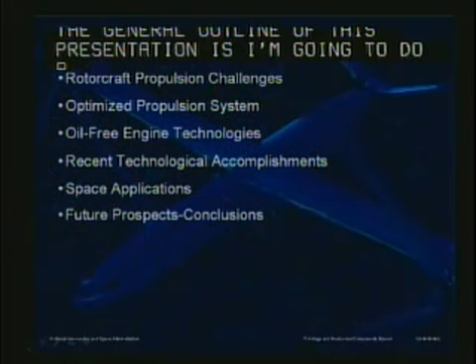The general outline of this presentation is as follows. I'm going to be doing a little bit of a background tutorial on rotorcraft propulsion challenges, because the challenges in rotorcraft propulsion are very unique compared to other flight regimes. And weight, I'll tell you right now, weight is a critical issue.

I'm going to be talking about developing a new concept called the optimized propulsion system, which really opens up the architecture trade space for future rotorcraft. And I'll talk about the oil-free engine technologies that make the optimized propulsion system possible.

I'll spend probably most of my time talking about oil-free engine technologies, and I'll be talking about the three key technologies: foil air bearings, high-temperature solid lubricants that protect those bearings during startup and shutdown periods, and the computer and analytical-based modeling that we do to try to integrate these three key technologies.

Then I'll review some recent technological accomplishments to try to give you a flavor for what the technology development path is, from first concept to laboratory work to first demonstrations and finally commercialization. And then I'll touch on where this technology helps the other part of NASA in the space power generation arena. And then I'll wrap up by talking future prospects and conclusions.

Next chart, please. And another way to put this outline is what I call the technology circle. If you think about it, at the top of the chart, we've got flight vehicles. That's our Cleveland Metro Health Center rescue helicopter.

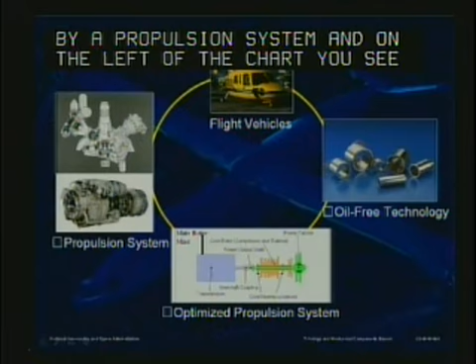That flight vehicle is supported by a propulsion system. And on the left of the chart, you see the propulsion system photograph of a turbine engine, which is used for its high power-to-weight ratio.

And that turbine engine drives a gearbox that reduces the high turbine shaft speed to the low rotor speed needed for efficient helicopter operation. And what we're trying to do is develop technologies that allow us to optimize that propulsion system.

That cartoon at the 6 o'clock position on the chart shows an engine on the right-hand side, which we're trying to make oil-free by taking the oil out and putting air bearings in, and then developing a specific multi-speed transmission that together form the optimized propulsion system.

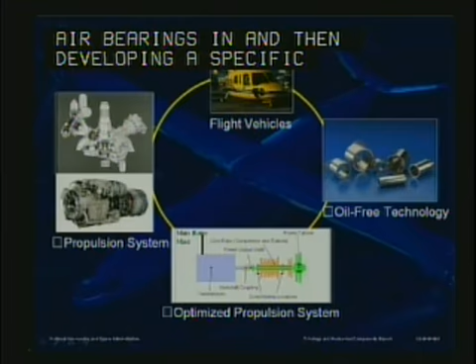And the way we do the optimized propulsion system engine, the oil-free engine, is to adopt oil-free technologies, and the photograph there shows some foil air bearings and specialized shafting that are put into those bearings. So as I go through this presentation, and I'm going to be spending time on the oil-free technologies, think about how those technologies feed into the optimized propulsion system that then go into future flight vehicles.

Next chart, please. Now, NASA's goal for rotorcraft is to radically improve the civil benefits of rotary wing vehicles. We're really talking about improving ease of access, reducing congestion at airports, enhancing the capabilities of emergency and rescue services.

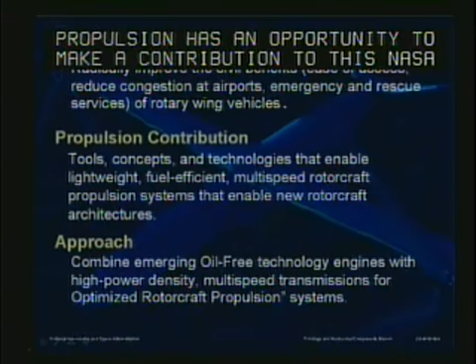Propulsion has an opportunity to make a contribution to this NASA goal. And when I talk about propulsion's contribution, I'm talking about developing tools, concepts, technologies, all aimed at enabling a lightweight, fuel-efficient, multi-speed rotorcraft.

Enabling new rotorcraft architectures. And when I talk about multi-speed rotorcraft, I'm talking about the ability of a rotorcraft to do vertical lift and faster forward flight than we can currently do.

The approach that we're taking to come up with these new propulsion systems to help NASA achieve this goal is to combine emerging oil-free technology engines with high power density, multi-speed or variable speed transmissions, in terms of that optimized propulsion system I talked about before. Next, please.

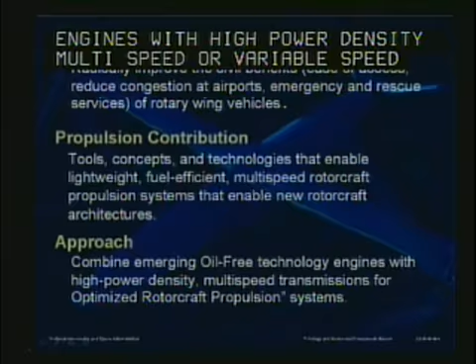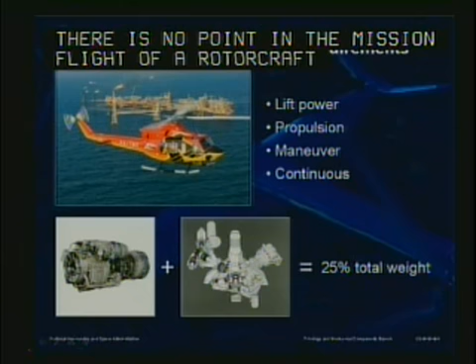And it has to do this at all times. There is no point in a mission flight of a rotorcraft that it can just kind of coast or glide in for a landing. The engine and transmission system has to be there all the time.

And it turns out that the total weight for a rotorcraft propulsion system, that being the engine and the drive system—you can see on the chart the engine at the lower left, added with the transmission or the gearbox—equals 25% of the total weight of the rotorcraft.

That 25% is a very large number. It's at least twice the total weight of the propulsion system in your traditional fixed-wing aircraft. What that means in performance terms is that everything we can do as propulsion system designers to reduce the weight of the propulsion system pays enormous dividends and benefits in enabling capabilities of the rotorcraft, more so than a fixed-wing aircraft. So if we can cut weight out of the propulsion system, we can do a lot more.

Next chart, please. So rotorcraft engines, they need to be lightweight, they need to be efficient, they need to be ultimate in reliability. They also need to be affordable.

They spend a lot of time flying close to the ground, rotorcraft do. They kick up a lot of dirt and debris, so the engines have to be very debris tolerant. And going hand in hand with debris tolerance is high durability, especially in rotorcraft engines, which tend to be smaller than your traditional fixed-wing aircraft. Internal engine clearances, for example, damage due to sand ingestion and erosion, can degrade performance more so than a large engine. So durability and debris tolerance are critical issues.

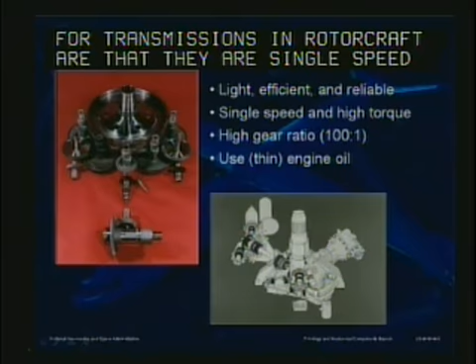The transmission, very similarly, needs to be lightweight, efficient, and reliable. The current state of the art for transmissions in rotorcraft are that they're single-speed gearboxes. There are no multi-speed transmissions, and this is really so that you can have a very lightweight system with typical gear ratios of about 100 to 1. You've got to reduce the RPM of the engine to a very low RPM to have efficient rotary wing operation.

Another aspect of rotorcraft transmission that most people don't realize is that rotorcraft transmissions, by and large, don't use transmission fluid like your automatic transmission in your car. They don't use gearbox oil like a stick shift transmission in your car might use. They actually use engine oil, and rotorcraft do this to try to avoid carrying two oil systems, one for the engine, one for the transmission.

So if you think about how we might change rotorcraft transmissions, we're looking at things like multi-speed transmissions, and we're looking at transmissions that can be optimized and operate on gear oil. I'll touch on that some more in the next charts as well. What do we want to do?

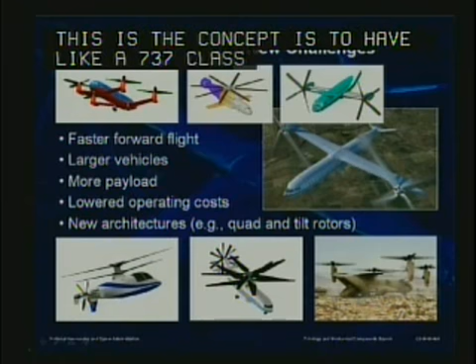Why do we have new challenges in rotorcraft propulsion? Well, these artist conceptions are different rotorcraft architectures that we would like to develop to achieve things like faster forward flight, to achieve larger rotorcraft vehicles with more payload and reduced operating costs. We're looking at things like quad rotors, tilt rotors. In fact, the larger picture on the right in the center is the artist's conception of the large civil tilt rotor. The concept is to have a 737 class vehicle that can take off vertically and fly at fast forward speeds. These types of vehicles require new propulsion systems.

So we want to achieve faster forward flight. We want to improve rotorcraft capability, but of course we don't want to pay anything for it. We want to maintain efficiency, and we don't want to increase noise. This really translates to challenges for the propulsion system in ways that aren't immediately obvious.

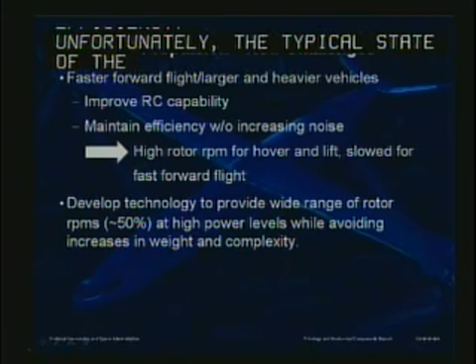For example, we need to maintain a very high rotor RPM for doing vertical lift and hovering. But when you're flying your rotorcraft at fast forward flight conditions, you need to be able to slow the rotor down so that you have a higher propulsive efficiency. Unfortunately, the typical state-of-the-art propulsion system is only efficient over a narrow operating range of rotor RPMs. So we need to develop technologies to provide a wide range of rotor RPMs at high power levels without increasing weight or complexity.

One of the ways we're planning to do this is to develop a multi-speed transmission. This is really going to be enabling for advanced aircraft. It may not seem like much of a challenge to the rest of the world because we drive cars every day that have 3, 4, 5, even 6 or 7 speed automatic transmissions. We've been doing it for decades. It shouldn't be that hard conceptually to develop a multi-speed transmission for a rotorcraft.

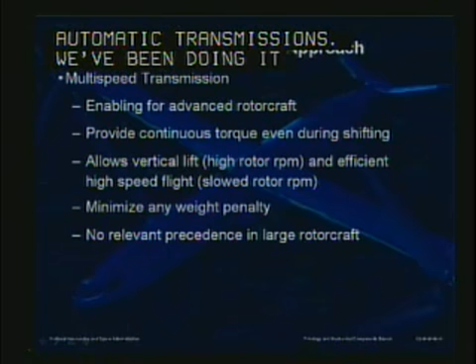But think about this. In your car, the way you achieve shifting from one gear to another is that the engine and transmission momentarily decouple and the car coasts for a brief instant while the gears change, giving you a nice smooth shift. But you can't really do that in a rotorcraft because you've got to be providing high torque levels to the rotor at all times to keep it lifted. So shifting is a real challenge. How would you shift a variable speed transmission? We've got folks in our transmission group working on those concepts now. So we want to develop these multi-speed transmissions and minimize weight penalties.

We really don't have a whole lot to go on in terms of precedence in large rotorcraft. So think about what we need to do in the balance of the propulsion system to maybe reduce the weight in the engine so that we could give the transmission designers a little bit more latitude in developing these advanced transmission designs.

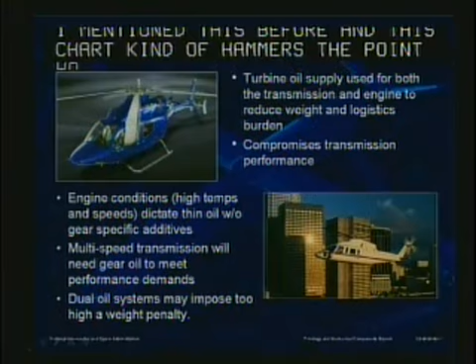I mentioned this before, and this chart kind of hammers the point home. Today's rotorcraft have a shared oil system. The turbine engine oil supply is used for both the transmission and the engine to reduce weight. If you had to carry a separate oil system for the engine and a separate oil system for the transmission, the rotorcraft propulsion system would get too heavy. This has a tendency to compromise the transmission performance.

The engine conditions dictate a thin oil with special additives to protect the oil at high shear rates in the bearings and high temperatures. It also precludes the use of gear-specific oil additives, the sulfur-containing compounds that we typically use in gears to be able to run them at highly loaded conditions. If we're going to develop multi-speed transmissions, we are most certainly going to need a gear-specific oil to meet performance demands.

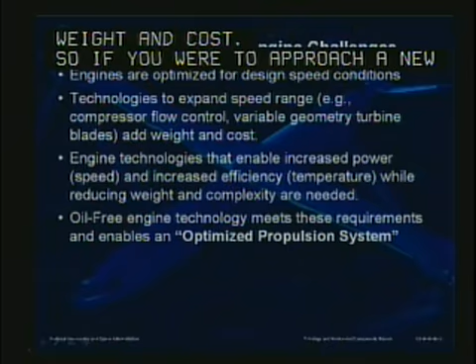In terms of the engines, rotorcraft engines are optimized for operating at one design speed. There are technologies available to expand the speed range, things like compressor flow control, variable geometry turbine hardware. These types of hardware add weight and cost. So if you were to approach a new rotorcraft propulsion system with the thinking of a single speed gearbox, but an engine that you could throttle back and forth, you're going to wind up with a weight penalty and a cost penalty.

So not only do we want transmission technologies that are lightweight and robust and multi-speed, but we need engine technologies that are higher power density, which means higher speed, and higher efficiency, which usually means higher temperature. So fast and hot are what we're looking for in an engine technology. Well, it turns out that the oil-free engine technology meets these requirements, enabling an optimized propulsion system.

The question is, can you really build an oil-free turbine engine to make this dream a reality?

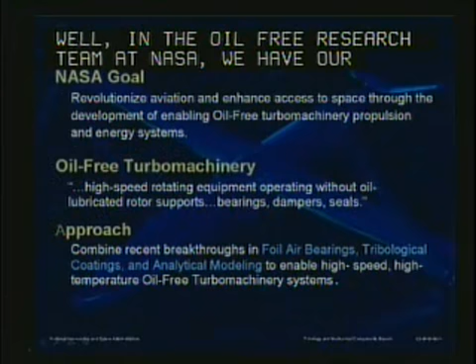Well, in the oil-free research team at NASA, we have our own kind of sub-project goal, and that is to revolutionize aviation, enhance access to space, and we're going to do this through the development of enabling oil-free turbomachinery propulsion and energy systems. We've kind of set the bar pretty high, and I hope by the end of this presentation you'll agree with me that bar is achievable.

When I talk about oil-free turbomachinery, I'm defining it as any high-speed rotating system or equipment that operates without oil-lubricated rotor supports. Because when you have a shaft and you want to support that on a system of supports, it's not just a bearing, but you have to have dampers to tame vibration. If you have oil in the system, you've got to have seals. Even if you don't have oil in the system, sometimes you need gas path seals. So we're talking about a whole system that we're trying to develop called oil-free turbomachinery.

And the approach that we're taking is to combine breakthroughs in foil air bearing performance, tribological coatings, and analytical and computational modeling to enable these high-speed, high-temperature, oil-free turbomachinery systems.

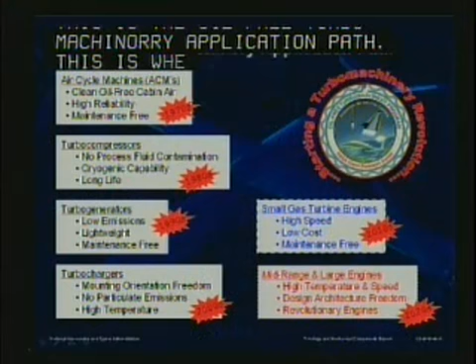This is the oil-free turbomachinery application path. This is where oil-free turbomachinery has been, where it is today, and where it's going. Starting up at the top left, we have a box there for air cycle machines. These are the cabin pressurization compressors that are used to provide clean, cooled, and compressed air on all commercial aircraft today. They're all operating on high-speed shaft systems and with compressor wheels supported on foil air bearings.

That technology, which was actually an outgrowth of the earliest space power turbines that were developed on foil bearings, hit the markets in the early 70s. The early 80s saw the extension of that technology to lower temperatures, cryogenic temperatures, in terms of turbo compressors.

In the 90s, we helped extend that technology to oil-free turbogenerators, microturbines, which give low emissions, low weight, and maintenance-free operation. More recently, we're seeing oil-free turbochargers hitting the streets where you get the benefits of lower emissions and higher operating temperatures. And the two boxes on the right, which have dashed lines surrounding them, that's where we're working right now. We're working small engine technology and eventually mid and large engine technologies as well.

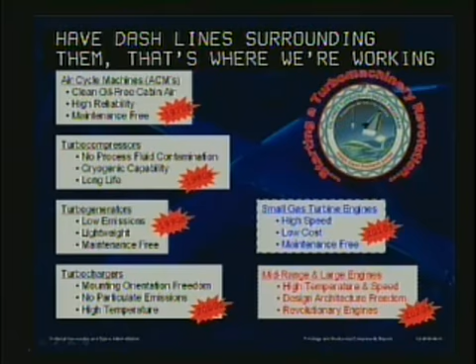Next chart, please. And here's what makes it possible, the three key technologies. Advanced foil gas bearings, where we've seen a doubling in load capacity, and that little picture of a foil bearing, the yellow picture, is a cross-section of a shaft bearing which shows the major elements,

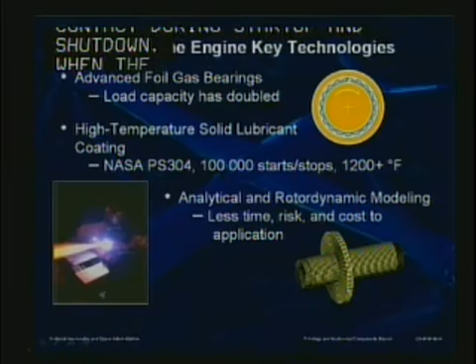High-temperature solid lubricant coatings that allow the bearings to endure a little bit of rubbing contact during startup and shutdown. When the speeds are low, there's not enough air pressure, the bearings do a little bit of rubbing, and we have to protect them. We've invented some coatings at NASA, like the NASA PS304, and I'll talk about that.

And finally, it's not enough to just have bearings and coatings. You've got to know how to use them. So we've spent a lot of time and put a lot of investment into analytical and rotordynamic modeling to try to predict how this technology is going to work and how to avoid high risk, the sort of a hardware approach where you just go in the lab, break hardware, and then scratch your head and try to figure out what went wrong.

Next chart, please. This chart says probably 90% of what you need to know about a foil gas bearing. The image on the right has call-outs to talk about the different parts of a foil bearing. You've got the top foil, which is a thin piece of sheet metal that wraps around the shaft, and I've got a bearing in my hand here. I hope the guys can pick it up.

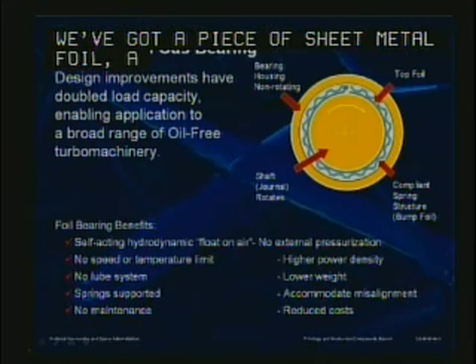But we've got a piece of sheet metal foil. It's a flexible membrane made out of Inconel superalloy foil. And that wraps around a rotating shaft, and the top foil is supported by a piece of corrugated bump foil. It looks like the center layer in a piece of cardboard box. And that's actually a spring pack. It allows a little bit of elastic support for the inner foil, but allows for misalignment and distortion.

And the way the bearing operates is that the shaft rotating is actually a viscous air pump. So the air molecules in this room are the lubricant for the bearing. The air molecules stick to the surface of the bearing, and when the shaft rotates, the shaft drags air molecules around, sort of a boundary layer effect, generating a circulation or wind pattern, if you will. And the foil surface is brought very close to the shaft, generates its own hydrodynamic self-acting air pressure, and actually the foil gets pushed off the surface and it floats on air.

So these, and I'll pass these around so you can get a feel for what they are and what they do. I've got this half foil here and a full foil bearing. Oh, thanks a lot, Stephanie.

The benefits of this technology are that the bearings are self-acting. You don't have to pressurize them from the outside to support the load. They generate their own pressure. There's no speed or temperature limit. In a ball bearing, the balls, as they rotate around a shaft, they centrifugally load the outer race and eventually overload the outer race. These bearings don't have any rolling elements and no centrifugal loading of an outer race, so there's no speed limit. We're not using any oil, so we can run temperatures easily, 1200, 1300, 1400 Fahrenheit.

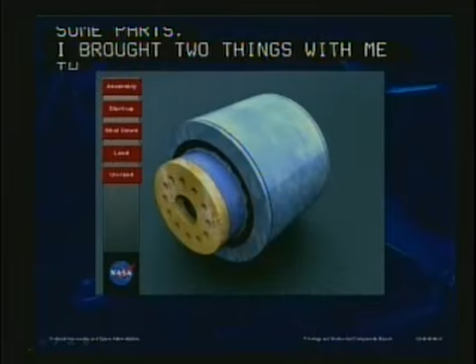I've got an animation that I'm going to show in a moment that shows the assembly of the foil bearing, and we'll put it through its paces, a few start, stop, and load cycles, and you'll see how it works. After the presentation is over, I've even brought a working bearing prototype with me, and those of you here at headquarters will get a chance to try that out. If I could ask the fellows downstairs to start that animation movie, that'd be very helpful.

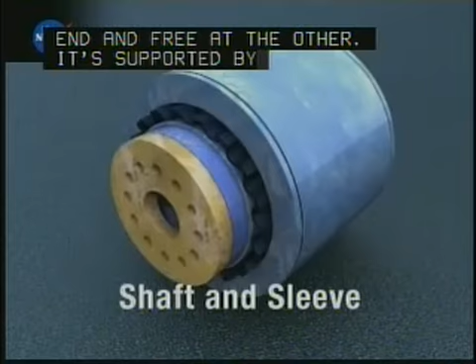So here's our foil bearing assembly. Top foil is what traps the air film. The top foil is tack welded to the structure of the bearing on one end and free at the other. It's supported by that bump foil. That's what gives it spring compliance. There's the shaft, which is that viscous air pump, and then the sleeve is just what you connect the bearing to the rest of your engine structure.

So there's a fixed end, and there's also a free end. The other end of the foils are free, and that free end allows the foils to move around and expand as the gas film forms. Now, gas or air enters the bearing at the air inlet. That's going to be pointed out here in just a second.

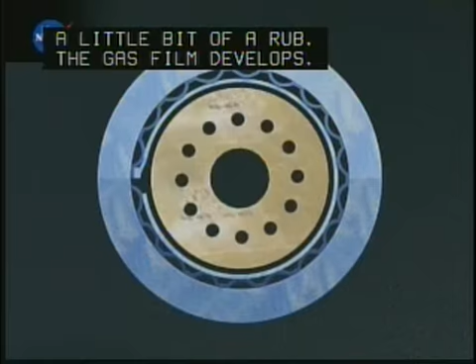So the air molecules stick to the surface of the shaft and get dragged into the bearing by the rotation of the shaft. It's going to start up here, get a little bit of a rub, the gas film develops, and when the gas film develops, it pushes and flattens out those bump foils. And the foils actually get a little longer at that inlet location. You get a little bit of sliding between bumps and foils.

During startup and shutdown, there's a little bit of a rub. You get the gas film formation. Now you're floating on air. There's no touching, there's no wear, and there's no oil system.

Under load, the gas film gets a little thinner, the bumps flatten out, but you design it in such a way that you don't have a rub during a high load event. Now during the load and unload cycle, which might happen due to shaft vibrations, you get a lot of rubbing that goes on between bumps and housings, and that gives you friction damping that helps tame vibrations in systems. And finally, during shutdown, you lose the gas film, you get a little rub.

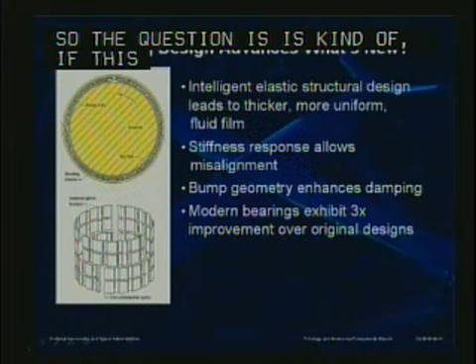Next chart, please. So the question is kind of begged, well, if this technology has been around since the 70s, what's new now? Well, this chart shows a modern technology bearing. The ones I've been passing around, the bump foils are all the same pitch and height, and they look the same everywhere. In fact, a cross-section through the bearing tells you the entire geometry.

What's new now is that we have intelligent elastic structural designs. If you look at this picture here, it's a bump foil in the lower left, which shows that the bumps are slit in the axial direction, that's up and down. Circumferentially, the bumps are none of them are the same height or the same length.

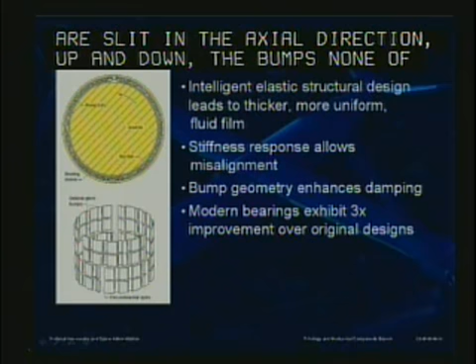And the designers have figured out how to tailor the elastic design to give us a thicker gas film, less side leakage of the gas pressure, which gives us more load capacity. They can tailor the stiffness to allow for a known amount of misalignment and distortion. And they've even figured out how to enhance damping characteristics by changing the bump geometry.

The upside is that modern bearings exhibit about a 3x improvement over the original designs. And this allows us to put them into more strenuous and challenging turbomachinery systems.

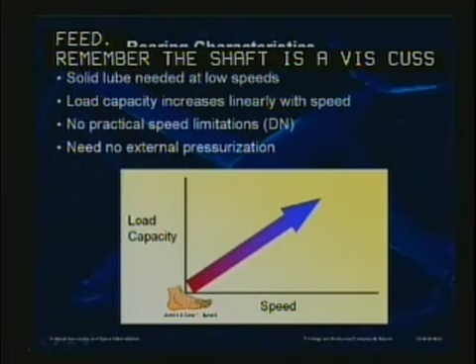Next chart, please. This is one of the key characteristics you need to keep in mind. This is a load capacity versus shaft speed of a foil bearing. Remember, the shaft is a viscous air pump. So the faster the shaft spins, the more air pressure you generate. The good news is the faster you go, the more load you support, and there's no speed limit.

The downside to that is that this technology has an Achilles heel, and that is at low speeds and during startup and shutdown, the gas film is inadequate, and you need to provide some solid lubrication, some advanced tribology. I needed to work that word in one more time.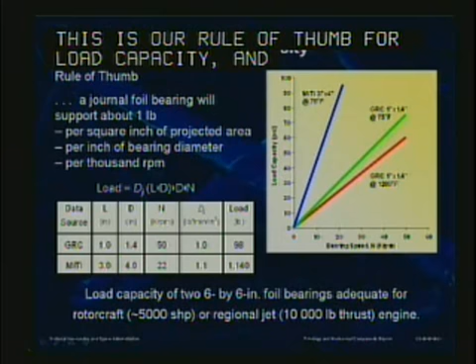Next chart, please. Here's some numbers that we've generated and some rules of thumb that we've generated. This is our rule of thumb for load capacity, and put simply, a journal bearing, like the one I'm passing around, will support about a pound of load per square inch of projected bearing area.

That's length times the diameter, per inch of bearing diameter per 1,000 RPM. Put algebraically, the load capacity equals a coefficient, which we've determined is about 1 for advanced technology bearings, multiplied by L times D, basically the size of the bearing, multiplied by dN, where N is the shaft speed in thousands of RPM. So faster is better, and bigger bearing size is better.

When we actually measure bearing performance in the lab, the first line of that data chart is for a 1-inch long by 1.4-inch diameter bearing spinning at 50,000 RPM. That was a bearing from our oil-free turbocharger. It'll support 98 pounds, which is about what you need for a turbocharger.

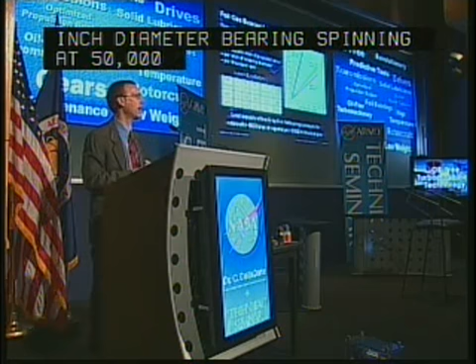But our colleagues in industry have built bigger bearings. A 3 by 4-inch bearing at 20,000 RPM supports over 1,000 pounds. That's what's shown on the chart on the right, which shows the load capacity in PSI, pounds per square inch, as a function of bearing speed.

We've extrapolated this load capacity to state-of-the-art bearings. Right now, the biggest bearings in laboratory stages are about 6 inches in diameter. Two 6-inch by 6-inch bearings on a shaft provide more than adequate load capacity for a rotorcraft engine or even a regional jet engine.

So we're learning how to model the bearings, and the bearings are proving that they behave in a physics-based way, the way we would expect.

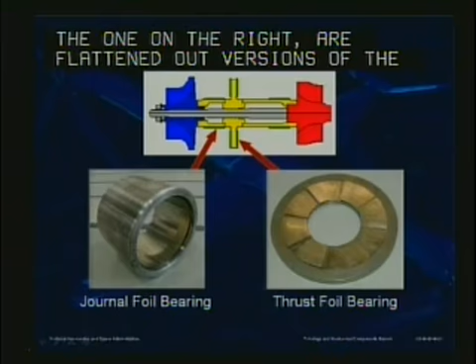The cartoon at the top is a cross-section of our oil-free turbocharger. It has two journal bearings supporting the shaft in the radial direction, controlling its motion in the bounce and oscillatory modes. The thrust bearing sits on a disc in the center and controls the shaft motion axially.

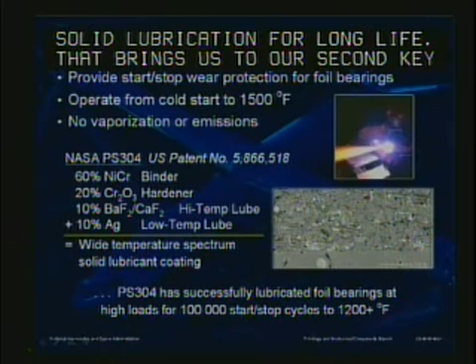And that brings us to our second key enabling technology, high-temperature solid lubricants. Now, you can use polymer materials like Teflon or molybdenum disulfide or graphite to lubricate foil bearings if they're never going to see high temperatures.

But in turbine engines, we want to run bearings very, very hot. So we had to go out on our own and invent some solid lubricants that could tolerate the engine environment from cold starts all the way up to 1200, 1300, 1400 degrees Fahrenheit. And we came up with the NASA PS304.

NASA PS304 is a shaft coating. I've got a shaft, and I'll pass this around in a moment, that shows the different methods we use to make the coating. But the coating goes on the shaft and operates against the bare superalloy Inconel foil.

The PS304 was designed and tailored just for foil bearings to provide friction and wear protection. It contains a nichrome binder, a chrome oxide hardener, a high-temperature lubricant made out of fluorides, and a low-temperature lubricant for cold starts, which is silver.

And when we combine these constituents together in the form of a composite coating, we wind up combining their performance properties as well. We have successfully lubricated bearings for over 100,000 startup and shutdown cycles from room temperature to 1200 Fahrenheit.

Just to give you an idea of what that means, if we had a rotorcraft operating out of an airport doing 5 flights a day, 300 days a year, after 60 years we would only have generated 90,000 startup and shutdown cycles. So we're truly talking about building a maintenance-free engine.

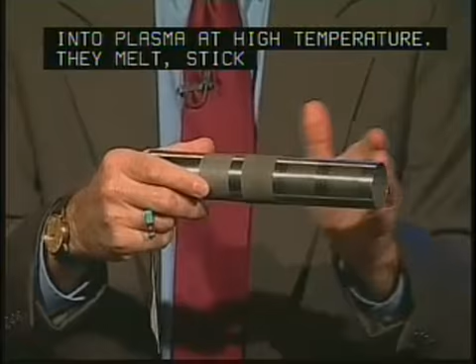They melt, they splat, they stick, and you build up a thick coating. Then you grind and polish it, and that's your bearing running surface.

Next chart, please. Just to compare the performance of PS300 type coatings with foil bearings, the lower bar on this graph shows that we can operate from cryogenic temperatures to above 600 degrees centigrade. Compare that with traditional oil lubricants, whether they're mineral oils or some of the more exotic synthetic fluids, even the fluorocarbons.

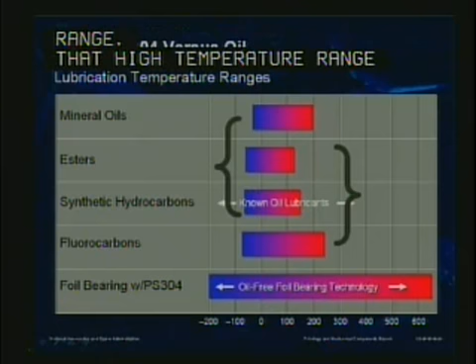They have a much more narrow temperature range, and that high temperature range is what is limiting some modern engine designs. We can't keep the oil cool enough in key locations. So foil bearing technology is actually seeing some early demonstration work in hot sections of engines.

Next chart, please. Here's a photograph of one of our bearings in our test lab operating at 1400 Fahrenheit. Certainly, if we tried to use any kind of oil in this application, you'd have a fire on your hands.

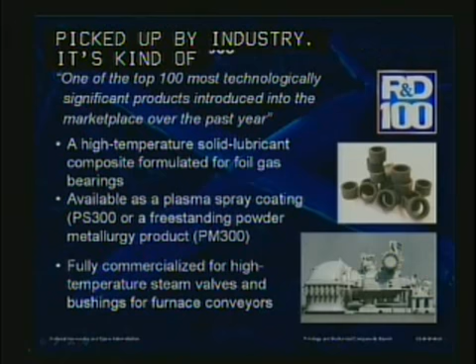Next, please. The nice thing about working for NASA is, on the one hand, we work on technologies that are 10, 20, 30 years out. We don't often see them get used. On the other hand, we're free to publish all of our information, and by getting the message out there that we've invented new technologies, sometimes they get picked up by industry, and it's kind of gratifying when you get recognized for this. In 2003, we received an R&D 100 award for our PS300 materials.

We produced a variant of it that is not just a coating, but a solid form material. I've got that in my hand. This is a PM300, powder metallurgy bushing. It's a bronze replacement for motor bushings and conveyor bushings, and it's good to about 1500 Fahrenheit.

This bushing material is in commercial use in furnace conveyors and has been for the last 5 or 6 years, saving industrial companies millions of dollars per year. It's also very worthwhile in the steam turbine industry for sliding mechanisms of control valves and things of that nature. So we've spun this technology off in the industry, and it's gratifying to see that we don't have to wait until we develop that new aircraft engine to see our technology paying off.

Next chart, please. So we have the bearings, and we have the solid lubricants. We could just run in the lab and try them out, but truthfully, many have done that before, and we've broken quite a bit of hardware. We've got a third leg of our stool, which is analytical and computational modeling, to try to understand what this technology is going to do before we actually do it.

So we're talking about advances in finite element methods, rotordynamic analysis, where we're trying to determine whether or not a shaft system is going to be stable or whether it's going to excite itself and go unstable.

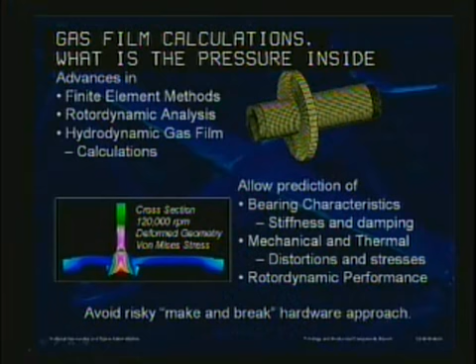Gas film calculations, what is the pressure inside of a gas foil bearing? What is the film thickness? Are we getting to a dangerous situation where the film is getting too thin and we're going to have a high-speed rub? If you're running a thin sheet metal foil bearing within a 10,000th of an inch of a shaft and you get a disturbance and you get a high-speed rub, you instantly melt all the materials that are in there. And so we see catastrophic failures, and they're not pretty.

So we want to predict how that's going to happen. The technology is very robust if the system is well behaved. So we do analysis to try to predict things like bearing characteristics, that'd be like spring stiffness and damping characteristics of the bearing.

We look at especially mechanical and thermal distortions. As shafts spin at high speeds, they centrifugally stretch. And as temperature gradients get into high temperature engines, you oftentimes will have localized thermal expansion and contraction. We want to make sure the bearing can follow the movement of the shaft and not bottom out anywhere.

And again, we also look at rotordynamic performance. These foil bearings have very nonlinear stiffness and damping characteristics, and knowing how they behave under different vibration conditions can lead to more robust systems.

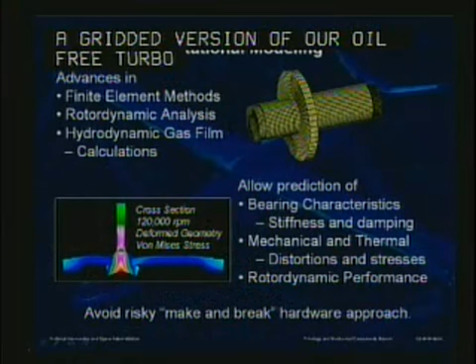The picture at the top right is the gridded out version of our oil-free turbocharger rotor, and the bottom left shows the centrifugal stretch of that shaft at 120,000 RPM. It told us that in the blue areas we were doing pretty good on a pretty flat cylinder for our bearings, but we had a high stress point right at the inside of our thrust collar. We needed to redesign it for that application.

Just one example, next chart please. We do modeling of the foil bearing structure, sometimes independent of the gas film. In this case, we've modeled that bump structure as a top foil resting on top of a bump foil, which rests on a bearing housing. We're modeling it in a fairly simple fashion as a spring with rigid links for the foil stiffness.

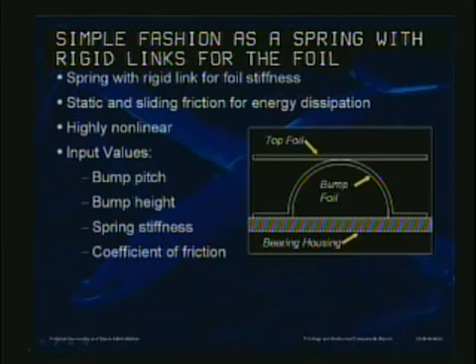We also have to pay particular attention to tribology, things like static and sliding friction for energy dissipation. Anyone who has worked with sliding components knows it's hard to predict the friction coefficient for first breakaway, and at different conditions, frequencies and displacements—it's highly nonlinear. So we input values like bump pitch, bump height, spring stiffness, and our best estimates of the coefficient of friction into these models to try to capture different bump foil structures.

Quite honestly, this is really a job that's too big for even one research group. So we've got collaborative efforts underway between NASA and university colleagues to develop predictive design codes for foil bearings, with the expectation that those codes will then be available for industry to plug in a new design, get the bearing properties, put it into an overall system design, and see if the thing is going to work.

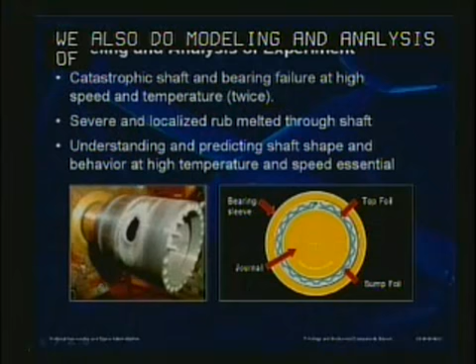Next chart please. We also do modeling and analysis of experiments. Oftentimes we'll run an experiment, get an unexpected result, and by modeling that unexpected result we can figure out what went wrong, and from that learn how to avoid it in the future.

We had a really interesting catastrophic failure of a foil bearing in a shaft in the lab, and I brought some of the damaged hardware with me. We were running a shaft on one of our test rigs with a business jet engine bearing mounted on it, at high speed and high temperature but fairly light load, running at steady state conditions—meaning we weren't touching anything.

We ran for about 9 minutes, and the bearing catastrophically and unexpectedly failed. The rig came to a halt just like that. We took the bearing off the shaft and found we'd actually melted a hole through the side of the shaft. This shaft is made out of Inconel superalloy, which melts at about 2,500 degrees Fahrenheit. We were only running at 1,000 degrees Fahrenheit.

We didn't really understand what happened, but we knew we had a high-speed rub in one location. Our first instinct was that we had a coating failure, or maybe an inclusion in the shaft material at one spot that broke apart, causing failure there. I'll pass this around now so you guys can see it.

We put the rig back together with a new shaft and a new bearing, and ran it again under the same conditions. It ran for 11 minutes and failed—though it wasn't really unexpected since it had happened at 9 minutes before. We took the bearing off and again found a hole in the shaft, right in the center. When it happens twice, you know there's something going on that isn't just materials related.

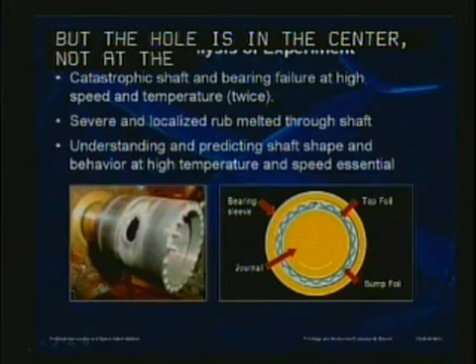So we had an event that we didn't really understand, but we knew we needed to do something to try to model and predict the shaft shape and behavior at high temperature and high speed. Being the keen senior government researchers that we are, we did what every other government researcher does under these conditions: we brought in a grad student. In all honesty, we thought this was a perfect opportunity to bring in a young person, teach them about oil-free turbomachinery, and utilize the most up-to-date modeling tools to figure out what went wrong.

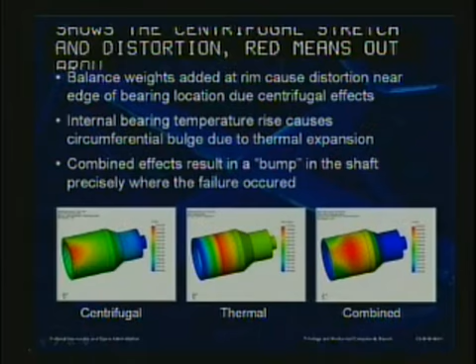That grad student, who was now an Army Research Lab employee doing a fabulous job, modeled the centrifugal stretching of the shaft caused by the balance weights we put in at the very edge of the shaft. The picture on the left shows the centrifugal stretch and distortion, where red means bulging out of the screen toward you. The centrifugal modeling showed we should have had a bulge right at the end of the shaft. But in the photograph, the bulge was actually in the center of the bearing.

So we went into the lab and measured thermal gradients in that bearing under those conditions, and noticed it ran hotter in the center than at the edges. That's not uncommon, because in a foil bearing there's always air exchange from the sides, so the center runs hotter. But it's a band of heat in the center, and because the Inconel expands at high temperature, that hot thermal gradient causes a belly bulge.

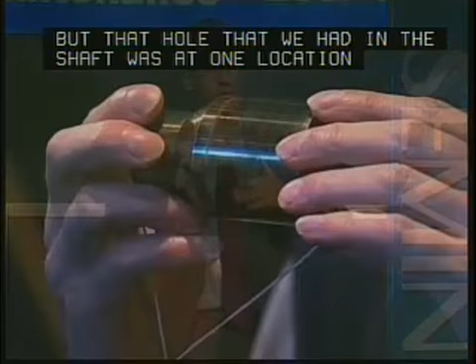But the hole we had in the shaft was at one location. So when we overlaid the thermal distortion and the centrifugal distortion together, we got the figure on the right, showing a red spot right where the hole occurred, which was a bulge. This is a solid model showing the bulge right where we found the melted shaft—I'll pass that around too, so you can compare and see that we really did a good job modeling it.

Interestingly, this experience of burning a hole in the shaft occurred with one of our industry partners about a month after we finished this analysis. They were running an engine, ran it for about 7 minutes, and it failed. They called us and said, 'You'll never guess what happened,' and we said, 'Yeah, you burned a hole in your shaft.' We were able to explain why it happened, and told them how to do better cooling of the bearings and use a slightly thicker wall to get rid of the temperature gradients. They ran the engine successfully after that.

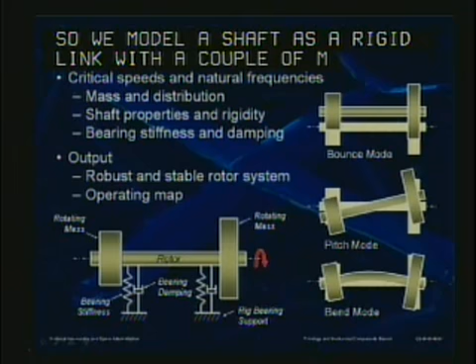Next chart, please. We want to predict rotordynamic performance—meaning, is the shaft going to spin stably and stay inside the engine where we want it, without turbine blades rubbing against housings or causing other damage. So we model a shaft as a rigid link with a couple of masses we can place at different locations, supported on springs with dampers built in, like the picture on the lower left shows. What we're trying to do is...

predict critical speeds and natural frequencies. Sometimes we move the masses and distributions around if we're doing design work, and we change properties of the shaft materials—rigidity, bearing stiffness, and damping—all aimed at figuring out whether or not the system is stable. Now, in a rotordynamic system, as a shaft goes through its critical speeds, it can bounce up and down as it's rotating—that's the bounce mode—or it can conically pitch.

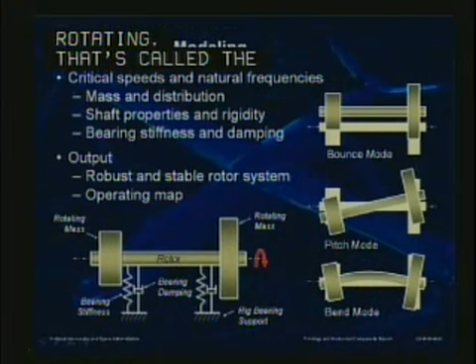That's the pitch mode - those are rigid body modes, where the shaft shape stays the same. At very high speeds, the shaft can actually bend as it's rotating - that's called the bend mode. We try to model these things and come up with an operating map of where these modes occur so that we don't have an operating condition right over one of these modes.

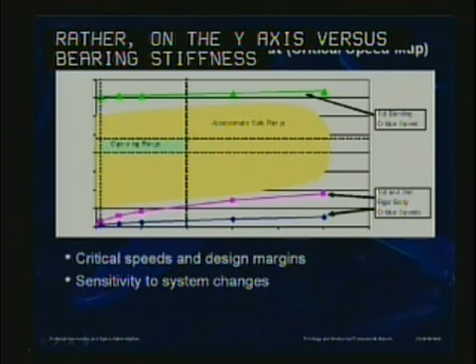This chart shows a plot of engine speed on the y-axis versus bearing stiffness on the x-axis. Those three lines: the first and second rigid body modes are the low end, the pink and the blue, and the green line at the top is our bend mode. What we want to do is pick bearing stiffnesses and operating speeds that keep us inside the safe range, the yellow area.

Remember, I mentioned earlier, turbine engines typically run over a narrow speed range. In this case, the operating range is that little green box. Designers can look at that and see that they can change the bearing stiffness properties and not run close to a rigid body mode or a bend mode.

We could change the speed range, or maybe lighten up the shaft and make it a little bit more flexible. That would move that operating range up closer to that bend mode. But this is the plot that a system designer would use to figure out how sensitive the system is to changes in bearing properties and shaft properties.

I'll just point out that most times when you're developing a new system, the plot doesn't come out this nice with all this margin around your operating speed range. Sometimes you run it the first time and you see your operating speed range is right on top of a critical speed. So it's kind of nice when you can do this and have some margin.

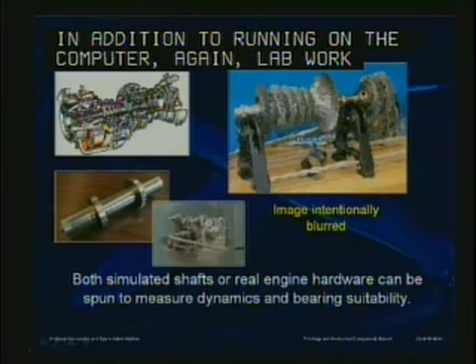In addition to running on the computer, lab work helps drive what we're doing. This chart shows at the top left a T700 helicopter engine, and just beneath it is the rotor simulator - that's that shaft. This time we've built it with masses on it that simulate the compressor and turbine. Sometimes we'll spin that in the lab and measure dynamic properties to get that critical speed map.

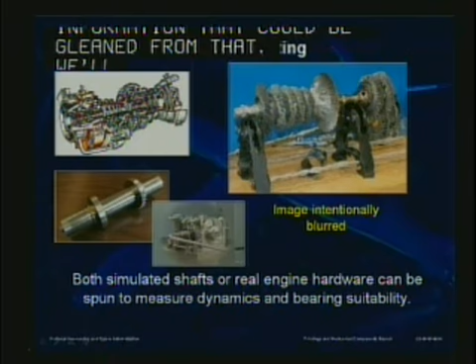One of the things we're doing most recently is we've actually gotten a hold of a used engine rotor with all the bladed components, and that's what that picture on the right is. It's intentionally blurred because there's some sensitive information that could be gleaned from that. But we're going to take a real engine shaft, spin it on foil bearings, and compare the dynamic performance of the real engine shaft to the dynamic performance of our simulated shafts that we usually use, so we have some physical basis and justification for using simulated hardware rather than real engine hardware.

Sometimes it's kind of nice to work on production hardware because you can actually get the real thing and test it. Most of our work is for future systems, and we have to sort of simulate and guess what it's really going to look like.

Another thing that we do is we look at bearing system level properties. This chart shows foil bearing tolerance to misalignment and tries to compare it a little bit to traditional bearings. We always say that gas foil bearings, because they're spring-mounted, have better misalignment tolerance than other types of bearings. We did some research recently where we actually proved this.

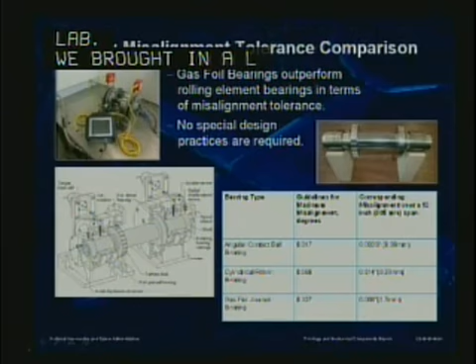We took a shaft, over in the middle on the right-hand side, put it on foil bearings in the lab, brought in a laser alignment system, and aligned the two bearings perfectly. We spun the shaft up and measured its properties, then intentionally misaligned the bearing centers and ran it again. We kept misaligning the bearing centers until we started to see distress in the bearings - temperatures going up, friction going up.

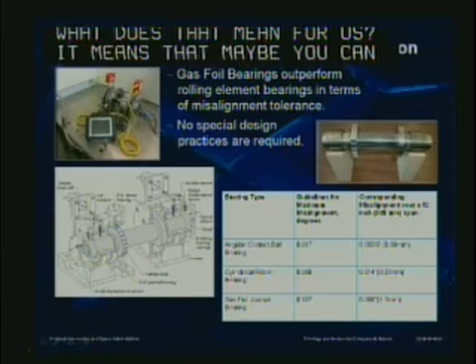What we found is captured in this table. For an angular contact ball bearing or a cylindrical roller bearing, you've got to keep the thing aligned within a couple hundredths of a degree. The foil bearings tolerated misalignment 5 to 15 times greater than that. What does that mean for us in real terms? It means maybe you can lighten up the structure of an engine, making the casing more flexible, because you don't have to keep the bearing centers perfectly aligned for a spring-loaded foil bearing. So it's a new design freedom.

Next chart, please. We also try to figure out how foil bearings are going to fail. Sometimes it's not just the shaft that fails, sometimes the bearings fail because they overheat. That's kind of a foreign concept because I spent all that time explaining how you can run the bearings red hot at steady state conditions, but if they keep getting hotter and hotter, eventually they'll overheat. So you've got to carry heat away through conduction and convection with blowing air. But since air doesn't carry heat away as well as oil does, we've got to pay attention to heat generation in the bearings.

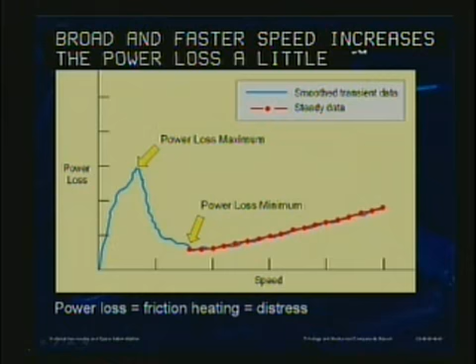This chart shows power loss in a foil bearing as a function of speed. Starting at the lower left, at zero speed there's no power loss. The bearing starts to rotate, it's rubbing, there's no air film, and friction and heat build. We get through a power loss maximum as the bearing is just beginning to lift off. The gas film generates, friction drops way down, and we get into what we call the desirable bucket, where that power loss minimum is. What we'd like to do is operate to the right of that minimum, where power loss change with speed is fairly broad, and faster speed increases power loss a little more. That way, if an engine slows down a little, the bearings get cooler, not the other way around. We try to avoid that steep region. Just keep in mind: power loss equals friction heating equals distress.

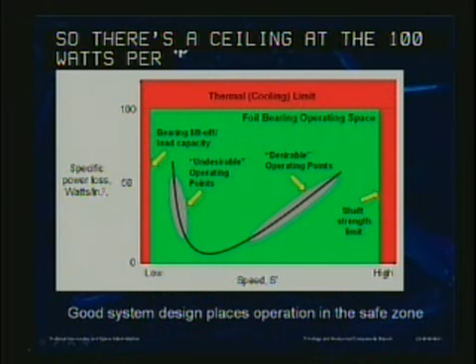Next chart, please. We took real data and made a cartoon of it, plotting specific power loss in watts per square inch as a function of shaft speed. The red areas are the no-go zones. We found that we cannot cool a foil bearing if it's generating more than 100 watts per square inch of friction heat, so there's a ceiling at that line. We know we can't run a foil bearing below the liftoff speed where it's rubbing, because it'll wear out the solid lubricants, so that's the line on the left. And we know we can't run so fast that the shafts come apart from centrifugal loading, so there's a shaft strength limit on the right.

We put in our power loss bucket and map out the undesirable operating points where behavior is very steep, where a little drop in speed makes things get hotter, bearings get tighter, which slows the system down even further and you get a thermal runaway. We like to operate in the desirable range to the right. The concept is a turbine engine designer would plot his idle speed and operating speed on this characteristic line for the bearing he's going to run, and see where he is and how much margin he has. This doesn't go quite far enough.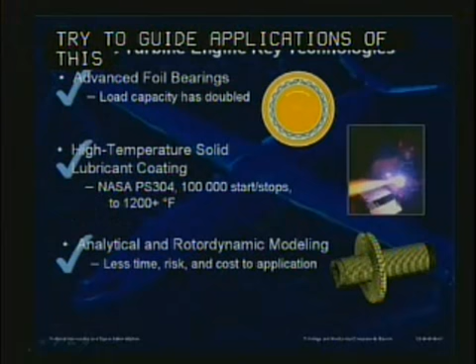Next chart, please. So we have these three key technologies, and the question is how do we use them? We have test capabilities at Glenn where we have bearing rigs, coating facilities, oil-free engines that we operate for long-term durability, the ability to run bearings at high and low pressure, and rotor rigs to prove out this bearing technology at a system level perspective.

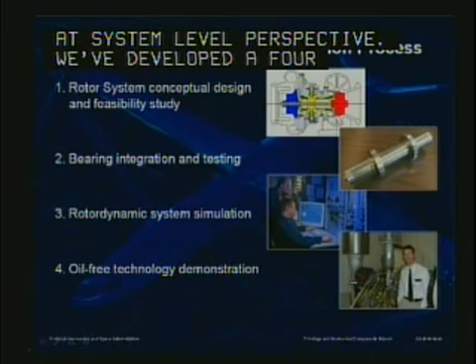We've developed a four-step application process where this is sort of a how-to for how you develop a new oil-free turbomachinery system. Step one is doing a conceptual design. Step two is doing bearing testing, to make sure the bearings perform the way you expect. Step three is the rotordynamic system simulation to look at system-level properties like misalignment and critical speed maps. And then step four is the oil-free technology demonstration.

What we've shown is that if you follow methodically these four steps in this order, your likelihood of success is very, very high. We've seen a lot of failures in industry over the years historically with this technology, and we find that they usually skip one of the steps. When we look at systems that have been successfully deployed, we see that our colleagues in industry have followed all four of these steps, though sometimes not in order. They have failures, and have to go back and redo a step if they skipped it. But this process works, and I'll show you an example of where it's worked.

We did an oil-free turbocharger based on a truck engine turbo. This is a cross-section of the turbocharger: two foil journal bearings, two thrust bearings, the NASA coatings. It was a hollow, rigid rotor.

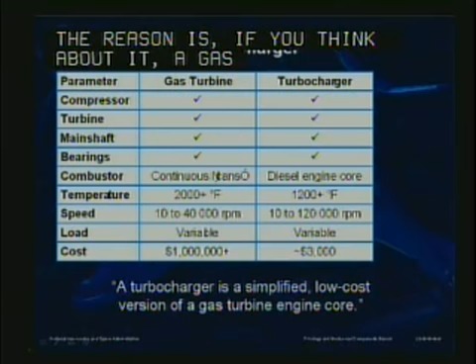You might be wondering why we did an oil-free turbocharger, and the reason is shown on this chart. If you think about it, a gas turbine and a turbocharger are very similar - they both have compressors, turbines, main shafts, and bearings. A turbocharger has a combustor of sorts - it's a diesel engine core. They operate at high temperatures and high speeds. One of the primary differences is turbochargers are less expensive. So a turbocharger is a simplified, low-cost version of a gas turbine engine core.

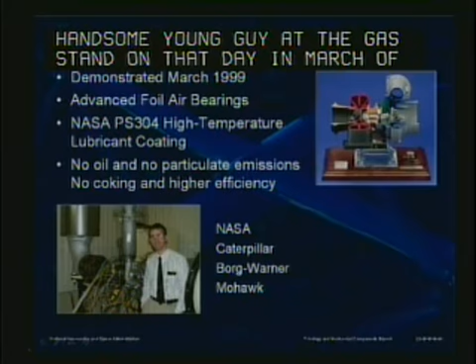We demonstrated this technology following our four-step process in March of 1999. This was a world's first demonstration - it had never been done before. It was a team of NASA, Caterpillar, Borg-Warner, and Mohawk Innovative Technology. The picture on the lower left shows a handsome young guy at the gas stand on that day in March of 1999. I kind of expected the turbocharger industry to pick this technology up immediately, but like any other pathfinder or pioneering experiment that NASA does, sometimes it takes a little while for industry to catch on.

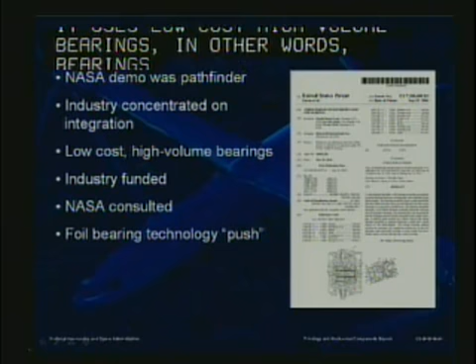It uses low-cost, high-volume bearings - in other words, bearings designed for high-volume manufacturing. Industry funded it themselves. They had asked for our help from time to time, but they basically did it on their own. This patent is their protection, and shows how they overcame integration problems for putting this in automotive applications. The reason this demonstration and this patent is important is it shows how NASA technology gets into the marketplace.

One step further than that, this use of foil bearing technology in a high-volume automotive application will push the foil bearing technology forward much more than any government-funded program could do. So as millions and millions of these turbochargers hit the streets, people become familiar with them, there are more design codes, more technologists. It'll be that much easier to spin this technology back into helicopter engines.

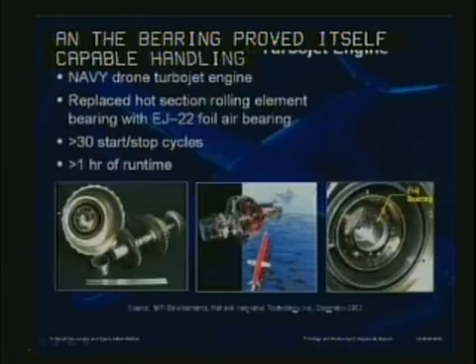This bearing was taken from this project and put into the hot section of a Navy drone turbojet engine. This work was done by Williams International and Mohawk Innovative Technology.

And if you go on their website, they talk in glowing terms about how well it worked. This is the engine that they failed the first time by burning the hole in the shaft. They don't like to put that on their website, and rightly, they probably don't need to. But it's a good example of where government research helps the industry, and now they're taking this technology further and making it available.

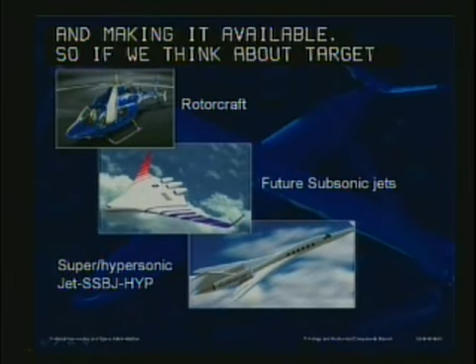So if we think about target aero propulsion applications, we've got rotorcraft applications, subsonic jet applications, and higher speed flight like supersonic business jets and hypersonic jets. I just want to touch briefly on the value of this technology in other vehicle sectors.

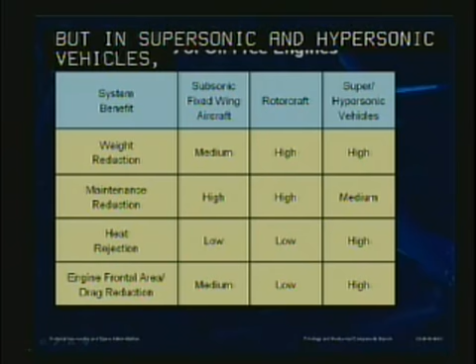If you think about a system benefit like weight reduction, maintenance reduction, heat rejection, and frontal area drag, that has different benefit levels for different vehicles. For rotorcraft, weight reduction is key, maintenance reduction is key, heat rejection not such a great importance. But in supersonic and hypersonic vehicles, things like being able to run bearings hot without necessarily a dedicated bearing cooling system is very important to high-speed flight. Reducing frontal area drag is very important, as is weight reduction. So we're seeing this technology now placed in key locations in hypersonic-type flight vehicle propulsion systems.

In terms of subsonic fixed-wing aircraft, the concept of building an engine that requires essentially no maintenance means you could put lots of engines on a wing that were low-cost, line-replaceable units, and maybe enable things like blended wing body and distributed propulsion, multiple engines.

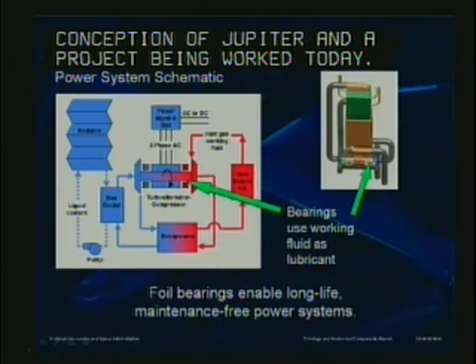The concept here, shown in this schematic, is to use a heat source, either a nuclear reactor or a solar concentrator, to heat an inert gas. The inert gas goes through a turbine, comes out, goes through a cooling system, through a compressor, and back into the heat exchanger, or even into a nuclear reactor directly. For this reason, oil lubrication contaminating the working fluid is not something that can be tolerated. Foil bearings, which can operate on the inert gas for these applications, are the ideal solution. And we've taken this concept even further than just the cartoon stage.

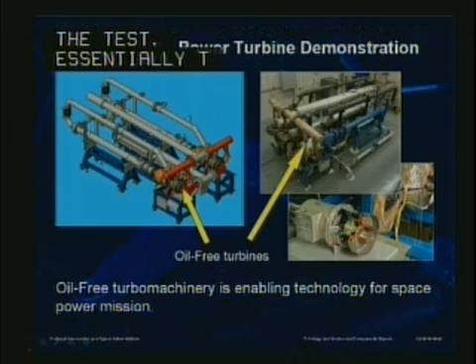At NASA Glenn, we have something called our oil-free space power turbine demonstrator. We call it our dual-loop Capstone demonstrator. The schematic on the left shows the piping arrangement, the picture on the right shows it in the test cell. It's essentially two oil-free 30-kilowatt microturbines that have been modified. We took the combustor out and replaced it with an electric heater to heat the gas as the heat source. So the gas is heated, the hot gas goes through the turbine, generates electricity, then goes through a cooler and back in a closed loop.

The beauty of this system is that it's a turnkey system that you turn on. As long as you're providing heat, it's going to run and generate electricity. There's no oil to change, no maintenance. So if you're going to do fission surface power and generate lots of electricity for years at a time without any human intervention or maintenance, this is really a key technology.

So if you think about what the future is, oil-free turbomachinery technology has future applications in lots of places. Rotorcraft, where we've got high temperatures and high power density engines, enables new architectures.

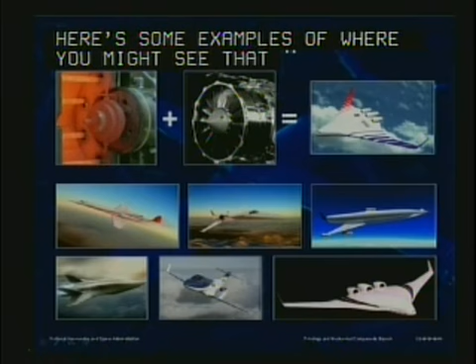Supersonic, business jets, fixed wing, hypersonic flight, all of them benefit from bearings that can run faster and hotter and require less maintenance. Here are some examples of where you might see that technology, ranging from business jets that are in flight certification all the way to some concepts for blended wing body and hypersonic vehicles.

And finally, lest we forget the contributions we can make in the space power and space propulsion arena, these technologies had their genesis in these space areas, and now that we've developed them further for other applications, we have the opportunity to reapply them in space power and propulsion to enhance that part of our mission.

So just to conclude, we've achieved breakthroughs and technology advances in three key technology areas. We've developed and proven a method for technology application and transition, and the newly emerging oil-free products are going to form a strong foundation for advanced rotorcraft, fixed wing, space power, and many other applications.

I'd just like to thank you for your attention and also give special thanks to my oil-free research team, the Rotary Wing Project, Fundamental Aeronautics, and the folks at Glenn in the graphics office that helped me put this presentation together. Thank you very much.